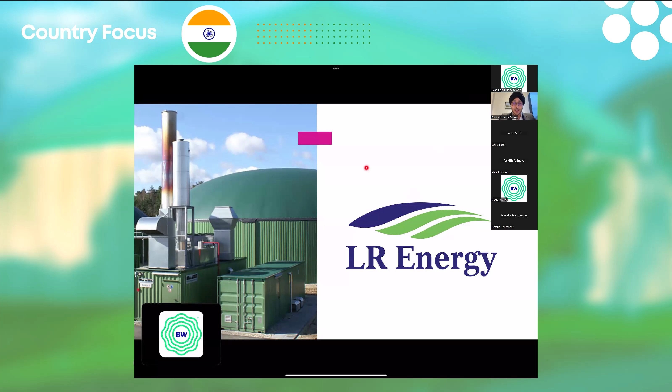Good evening, everyone. My name is Ekasjyot Barara, and I'm the co-founder and director of growth and innovation at LR Energy. I'm thrilled to be speaking to you today. A special thank you to BiogasWorld and Biogas community for hosting this important webinar focused on the Indian biogas sector. Today, I'm here to showcase LR Energy, a company that has positioned itself as a leader in the renewable energy sector, especially in the development of compressed biogas solutions. As a project developer and technology provider, we are pioneering sustainable energy solutions that are not only environmentally responsible, but also economically viable.

LR Energy is a renewable energy company dedicated to harnessing technology and innovations to create a cleaner and greener future. Established in 2017, we specialize in solar power and biofuels, which are instrumental in reducing carbon footprints and promoting energy independence across India. We're managing renewable assets worth over $50 million with an additional $100 million in the pipeline. Our vision is to lead the transition to a sustainable energy future by developing and deploying cutting-edge technologies. Since our inception, we have generated over 500,000 megawatt hours of renewable energy, a testament to our commitment towards sustainability and environmental stewardship.

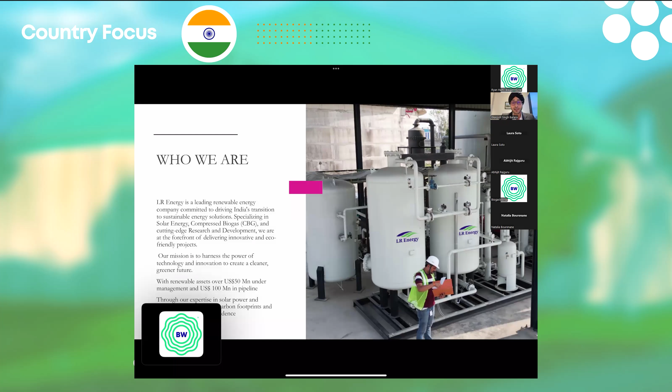While the primary focus today is on biogas, it's important to note that LR Energy has substantial experience in solar energy as well. We have developed multiple megawatt scale solar power projects across the northern region of India, contributing significantly to our goal of providing reliable, sustainable power to communities and industries. These projects range from rooftop installations to large-scale solar farms, all of which play a critical role in reducing carbon emissions and supporting India's energy transition.

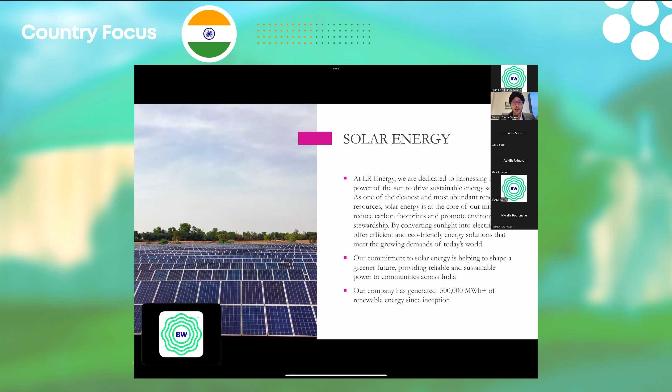Now let's talk about what brings us here today, our work in compressed biogas. In 2018, LR Energy embarked on its journey into biofuels, coinciding with the introduction of India's SATAT initiative, which stands for Sustainable Alternative Towards Affordable Transportation. SATAT was a game changer, and LR Energy was amongst the first companies to receive authorization to set up CBG projects under this policy.

Our CBG projects represent a vital component of India's renewable energy landscape. By converting organic waste into clean, renewable fuel, we are transforming waste management practices while contributing significantly to the country's energy security. Our projects reduce greenhouse gas emissions and provide a sustainable alternative to fossil fuels, particularly in the transportation and industrial sectors. By the year 2030, our goal is to process over 25 million tons of waste annually through co-development of these projects across India. Besides this, we have also secured long-term sale agreements for our raw materials needed for the CBG projects, and we have partnered with Indian Oil, GAIL India Limited, and other OMCs for supply of the CBG.

A remarkable moment in our journey was when we secured GAIL India Limited's investment in our projects. Being the only company in the CBG industry which has an investment from GAIL is a strong endorsement of our capability and potential in this sector. Furthermore, the byproducts of our CBG process, such as organic manure, play a crucial role in reducing the use of chemical fertilizers and rejuvenating soil health, thus contributing to sustainable agriculture.

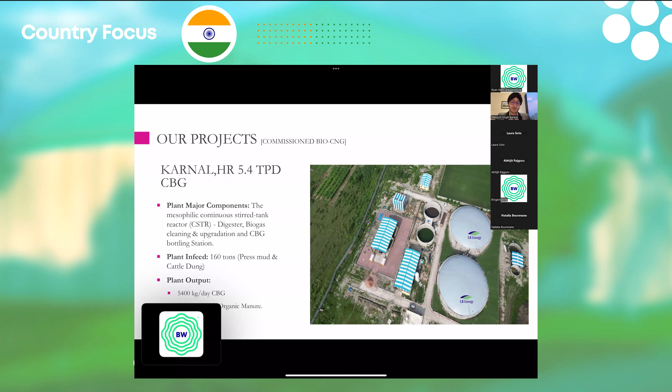Similar to the first project, our Sonipat project is located about 100 kilometers away from our HQ. It's very similar to the Karnal project, with more improvements and technology enhancements. A significant difference is that GAIL India Limited is a stakeholder in this project, reflecting the strong industry partnership we have built. Both of these projects are commissioned and operational, and both are ready to be scaled to a double capacity of 10.8 tons per day in the coming years.

The impact of our projects extends beyond energy production. From our operational CBG projects, we can save over 50,000 tons of CO2 emissions per year. They also generate more than 100 jobs, impacting 300 families, contributing to local economies. The fuel produced can support over 68 million kilometers of travel annually, offering a clean alternative to traditional fossil fuels. The emission savings from our projects could offset a substantial portion of the carbon footprint from India's transport sector, which is critical for LR Energy and the country working towards climate goals.

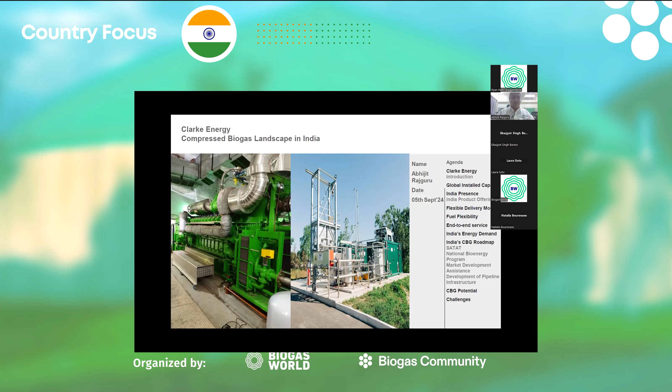Clarke Energy is an authorized distributor and service provider for INNIO Jenbacher in 27 countries worldwide. Our focus is on both natural gas and non-natural gas applications. We have positioned ourselves as an EPC contractor for gas engine-based captive cogeneration and tri-generation solutions, and also for biogas upgrading solutions, battery energy storage systems, microgrids, carbon capture, utilization and storage, and green hydrogen projects. We are headquartered in UK and are a service-driven organization with a very strong service ethos. We have an installed base of approximately 8.5 gigawatts, considering both natural gas and non-natural gas applications.

Next slide, please. Coming to the India geographical area, we are headquartered in Pune, state of Maharashtra, with satellite offices in Vadodara, Calcutta, Chennai, and Noida. We have several regional service centers located throughout the country, as well as 2 central spares facilities. In India, we are sitting on close to about 500 megawatts of installed base, out of which 400 megawatts is on the cleanest form of fossil fuel, natural gas, and the remaining 100 megawatts on waste-to-energy projects. Next slide, please.

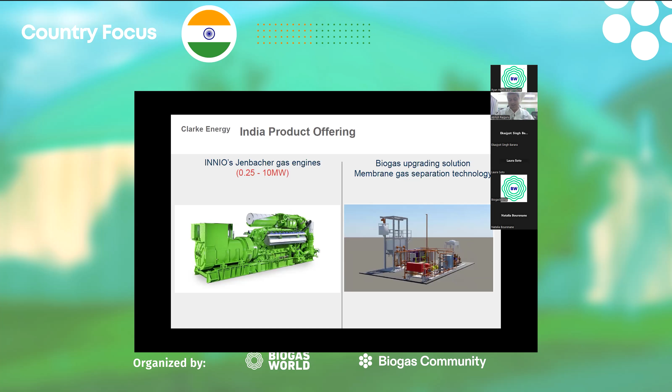Next slide, please. Clarke Energy at the group level has handled biogas generated from agricultural waste, food waste, wastewater treatment plants, starch industry sector, dairy industry sector, and landfill sites. Next slide, please.

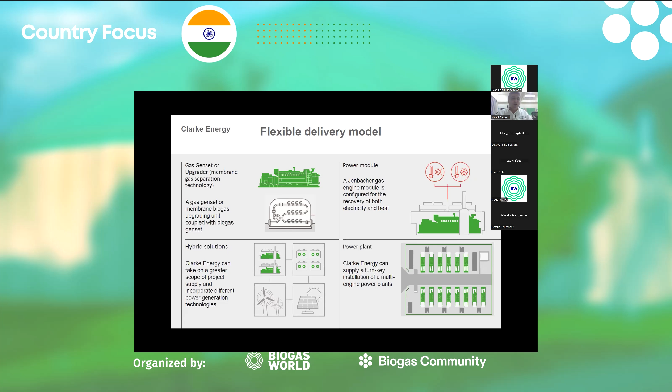At Clarke Energy, we offer a flexible delivery model, starting with a single gas engine or a biogas upgrader, or it could be a biogas upgrading plant coupled with a biogas-based power plant, all with the intent of trying to make the entire plant self-sufficient energy-wise, supplying power modules. Typically in power modules, you try to recover the waste heat available from 2 sources: one from the exhaust flue gases, and the second being the hot water circuit. Clarke Energy can also supply a turnkey installation of a multi-engine power plant. Next slide, please.

We at Clarke Energy's offices in India offer an end-to-end service for projects related to both gas-to-power as well as biogas upgrading solutions using membrane gas separation technology. Next slide, please.

Now let's come to India's energy demand and the gas transition market. You must be aware that India ranks 14th in the world for natural gas consumption and 22nd in the world for natural gas reserves. India has set a target to enhance the component of natural gas in the energy basket from the present 6% to 15% by 2030. According to recent reports, almost 46% of India's natural gas demand is being met through imports. Now, CBG, or biomethane renewable natural gas, is a domestic renewable energy source, and it holds substantial promise to bridge this gap and achieve the country's clean energy objectives. Next slide, please.

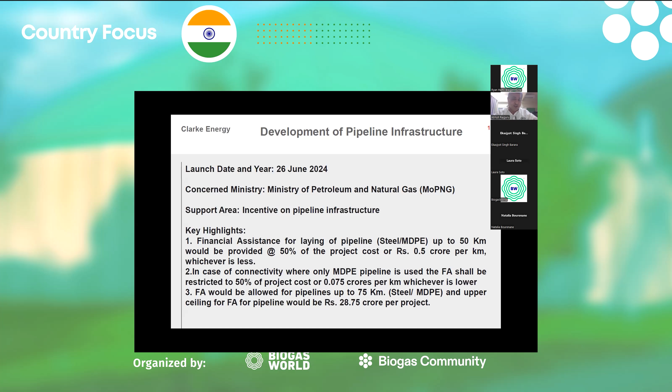When we talk of potential, it's more from the point of view of feedstock. When I talk to my offices in US, UK, France, everyone talks only in relation to agricultural residue. But in India, people talk of different feedstocks: press mud, which is waste from sugar mills; spent wash from the distillery industry sector; sewage treatment plants; agricultural residue; and poultry and animal manure. As per recent reports of CSE, close to about 62 million metric tons per annum is the potential, taking into consideration these feedstocks.

What I understand from project developers is that, with certain challenges, everyone tends to go with multi-feedstock. So it's not going to be just one feedstock undergoing anaerobic digestion or biomethanization, but it will always be a multi-feed.

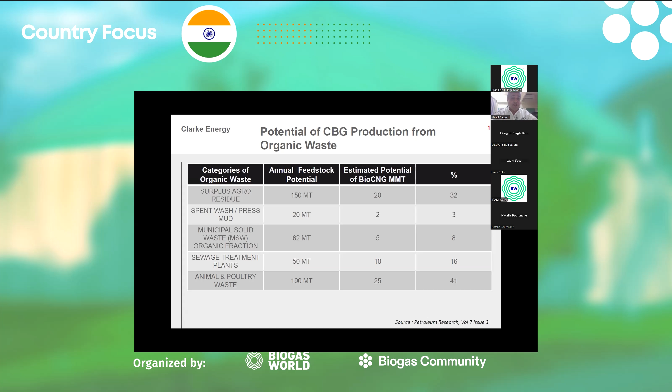So now talking about the challenges in relation to the CBG sector. Of course, this is all input which has been given by project developers who are setting up plants, whether it is with a single feedstock or multi-feedstock. And also very recently, people are talking about energy crops like Napier grass, which is also gaining a lot of momentum.

The CBG sector in India has its own challenges, starting right from the feedstock stage. There are issues of inconsistent quantity and quality of raw material, which often leads to increased prices when the demand is high.

Substantial investments are needed for proper storage of the feedstock and to prevent the seepage of leachate. This is typically what I have come across when it comes to press mud as a waste from sugar mills. Sugar mills in India operate anywhere from 160 to 180 days, but you have to ensure that the press mud is stored if that's going to be one of the feedstocks for your project undergoing anaerobic digestion, so you need proper storage to utilize it over the entire 365 days.

And first of all, I'd like to thank India for launching a global biofuels alliance just a year ago, in the space of BiogasWorld, to be able to network with possible and very inspiring opportunities that we were just discussing. This is a high-level support group that is encouraging, and probably India's leadership is doing this faster adoption of biofuels worldwide.

They plan to do this through better technology and smart use of resources, so that's great. This is a really big deal for the green energy world. It aims to push countries and businesses to use more green fuels, just like biogas and biomethane, helping our planet breathe better. And Drycake does the same.

We are dedicated to making a meaningful impact on our planet through innovative infrastructure solutions that enhance sustainability and efficiency in waste management. Our process packages enhance environmental sustainability by recovering clarified liquids and dry solids from process streams. We minimize landfill waste, generate bioenergy, and increase the availability of water in the environment. So Drycake is a leading global provider of separation technologies specializing in reusing and recovering liquid and solid waste.

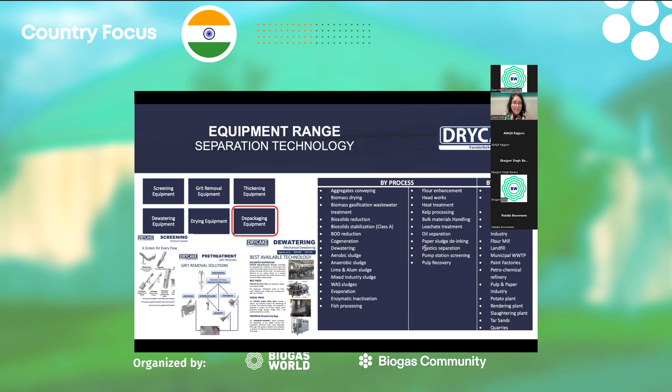It is far from easy to review all of Drycake's products. So we're just going to focus on one specifically, which is the depackaging process, since there are so many other applications listed in the presentation.

Thanks to our dedicated research and development team, our equipment range is continually evolving and improving, ensuring it remains the top choice for quality, reliability, and performance. Drycake's technical department excels in managing all design activities, from the initial feasibility to final implementation. We offer a comprehensive process validation service, which can be conducted either in our lab or on site with pilot testing in our manufacturing facility. Drycake plants are operated using PLC systems and are equipped with the necessary instruments to continually monitor key process parameters such as temperature, pressures, and flow rate.

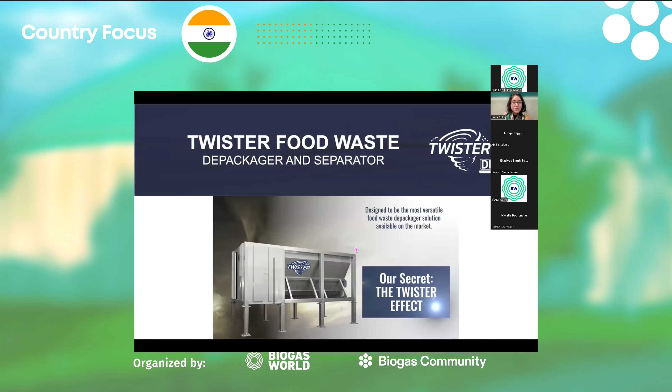So years of experience has led us to develop the Twister food waste depackager. Where is the depackager placed in this process?

So organics recycling programs are not new. Improved understanding of the challenges and possibilities associated with these processes can help transform perceived complications in the process into an economic and environmental opportunity within the circular economy.

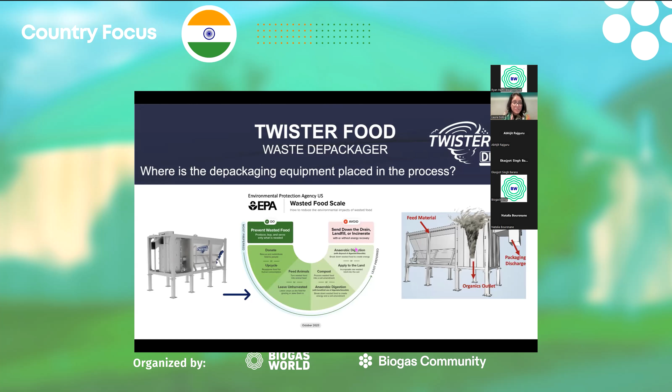So the primary purpose of the Twister, which is the machine you can see in my presentation, is to produce clean organic material for use as feedstock for anaerobic digestion plants and composting. The secondary purpose is to produce an output, which is the rest of the material, formally referred to as rejects or discharge. It has high durability and built-in quality to ensure long-term reliability.

And we all know machines consume a lot of power, so the Twister considers energy efficiency models to reduce operational cost.

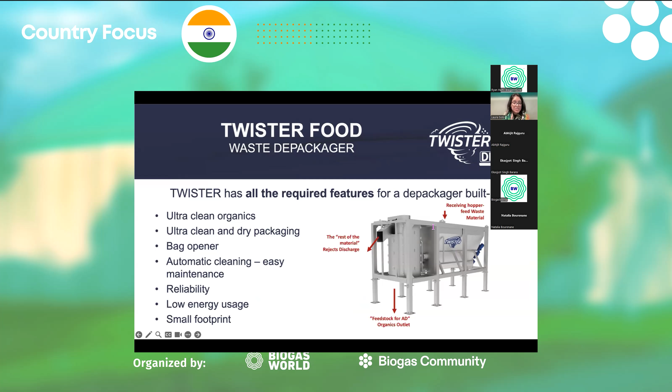Whether you're buying a machine for the first time, upgrading outdated technology, expanding an existing facility, or thinking about all of these new potential opportunities, we know about the challenges of waste. So what is your input? What are your output requirements? We go through capacity and throughput.

The Twister offers adjustable settings for different particle sizes, which can be crucial depending on your application. Additional upstream or downstream equipment might be needed, depending on the complexity of the product and the output requirements.

So the Twister is a third generational vertical cyclonic separation technology developed by Drycake. The key feature here is that the separation is not done through size reduction, but by a vortex effect. Like a twister or a tornado, the light materials lift up in a spiral movement in a turbulence.

The Twister is the only depackager that can handle large plastics and textiles. Even a small carpet has gone through the Twister. There's no need for a shredder ahead. So the separation is done strictly by wind force, vortex effect, tumbling, vibrating, not by shredding.

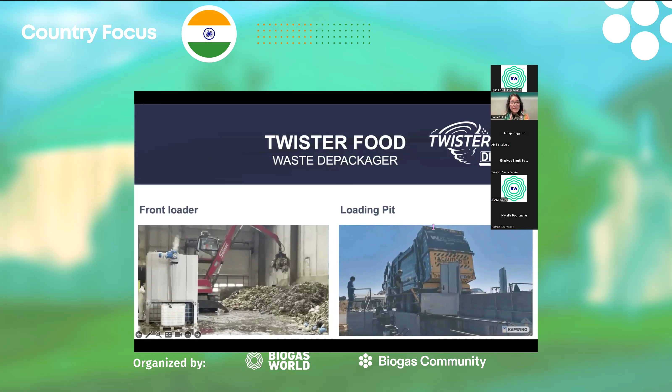This is just an illustration of examples of the loading operation of how the Twister can be done. It will depend on each facility and would need to be revised by the design process for each project. The vertical depackager is sideways, as you can see.

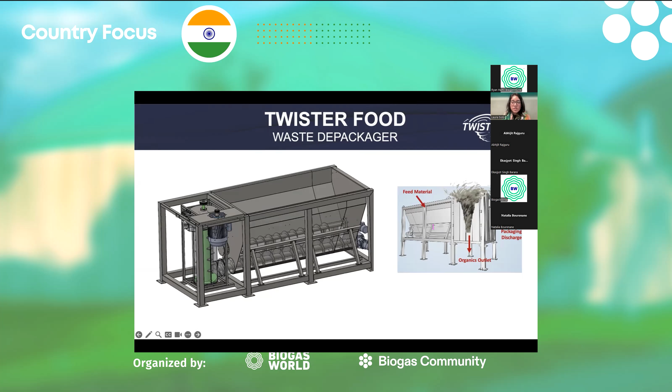The receiving hopper directly feeds the organic waste to the vertical depackager through the feeder screw, as shown in the picture. I'll explain a little bit more about what happens in that chamber. At the filtering zone, the vortex pressure and turbulence push the organic materials through the filter so that the output is a soup that contains an industry-leading high-quality pulp, perfect for anaerobic digestion and composting.

The organics fall back into a submerged bottom at the twister, as you can see from step 1. The turbine generates a vortex effect that sucks up the rejects and makes a high-speed centrifugal discharge that is clean and free from organic matter and dirt. The turbine plates that you see in step 2 at the vortex effect act like a baseball bat and knock and bounce the heavy rejects upward.

Two or more vertical plates spaced apart around the circumference of the shaft are configured to create a suction force to lift the plastics and packaging upwards once it has left the liquid mixture, as you can see from step 2. So the extraction zone might contain anything that people put in waste bins.

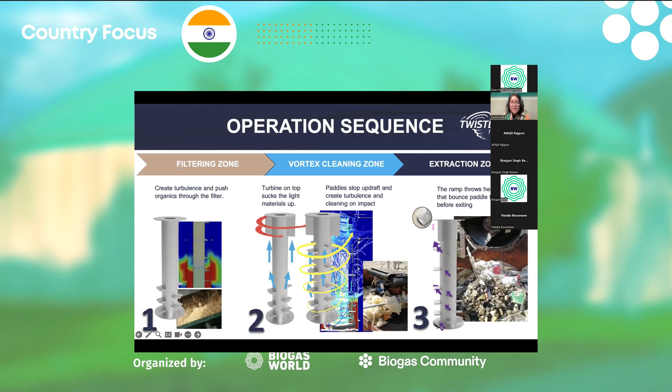These can be classified into 2 primary materials: heavy rejects such as steel cans, aluminum cans, glass, bolts, nuts, textile, stones, and even kitchenware, which have gone through the twister. The light rejects could be Tetra Pak, carton core, cartons, films, plastics, even paper. If it's not wetted enough to soften and drop into the organic stream, it will go upward.

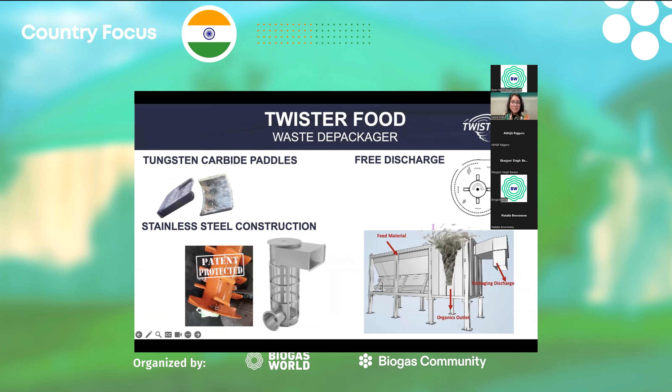I'll show you 3 key differentiators considering other competitors of similar technology: tungsten carbide paddles, one stainless steel construction, and free discharge. There's no obstruction on the discharge at the top. One thing I also like to highlight is that the plate configuration in the chamber we just discussed allows the trajectory of the waste and has a cleaning effect without shredding the material being cleaned.

Adjustments can be made to the size and angle of one or more of the balancing plates. The change of angle can disturb the helical path of the light materials to ensure proper tearing of the packaging in applications where the packaging is difficult to open.

These are all patented and protected, and these are just examples of clean and dry packaging. A complete list of performance videos can be found on our YouTube channel, and you're also welcome to ask for some of those videos.

This is an example of the carpet that comes out undamaged, and a tray of exotic foods. You know how these packages can be very light, but the gentle operation of the twister allows it to come out in one piece. Exchangeable screens allow different material inputs to be handled.

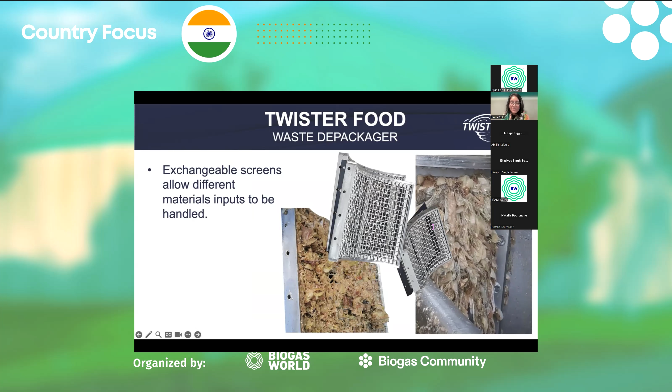The patented filtration screens result in a clean organic soup without the need for a second pass. These are examples of custom design layouts.

Drycake is in the position to offer a complete range of products and accessories for the organics operations of any waste diversion, biogas, or composting facility.

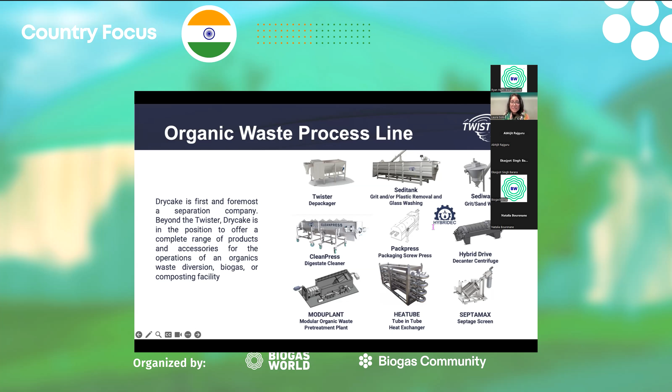We've seen the rising concern of visible plastics in the solids and liquids that aren't beneficially a good use. So the Seditank could prevent plastics from entering the anaerobic digester also. It's a sedimentation system that allows the floatants to be taken out.

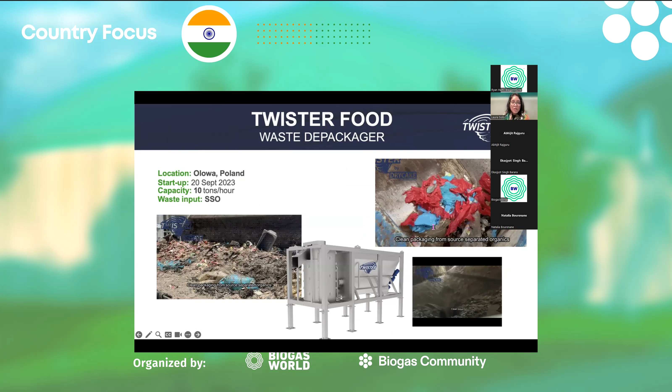I'm also going to show you right now the use cases of the twister, 3 examples. One right now is in Poland. They're treating source separated organics, and they are having great success with how the material comes out very clean, clean soup also.

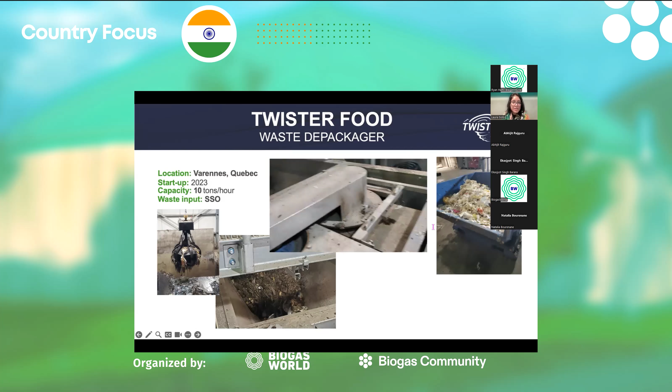This is in Quebec, and although the operation does involve shredding before, the plastics are somehow shredded, but they are completely clean. And this is a very small mini twister in a dry operation of gypsum.